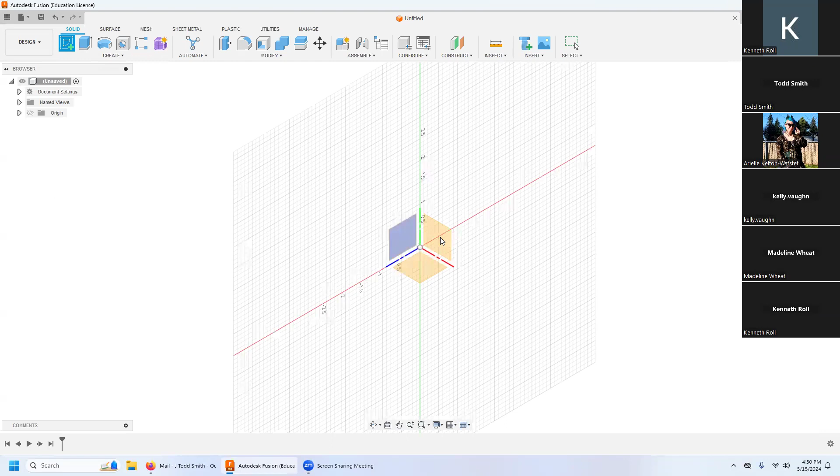Okay, so creating a sketch, coming in here, circle diameter, and I'm setting that to being 1 inch.

And I'm actually going to make that... stop that. I'm going to make that construction. Now, almost always when you hear me say 'stop that,' I am then hitting escape a bunch of times to get out of whatever mode it's trying to do.

Okay, creating sketch again. And I'm going to go over to, now there's something else we can do. Let's see if this is going to work. I'm going to go over to offset. Okay, so I can't offset from that. So maybe I'll hit P for project, and I can project that circle there from my stock representation.

And now I'm going to go to offset. I can click on that and offset it a distance in, like maybe I want that to be—make sure I leave 10 thou per side.

Seems a little shallow. I'm a little nervous on just 10 thou. I like 20 better, honestly. That is to say, I like 20 because I don't trust the stock to not wobble or be egg-shaped or whatnot, and 20 thou per side is going to give me usually enough to clean that up.

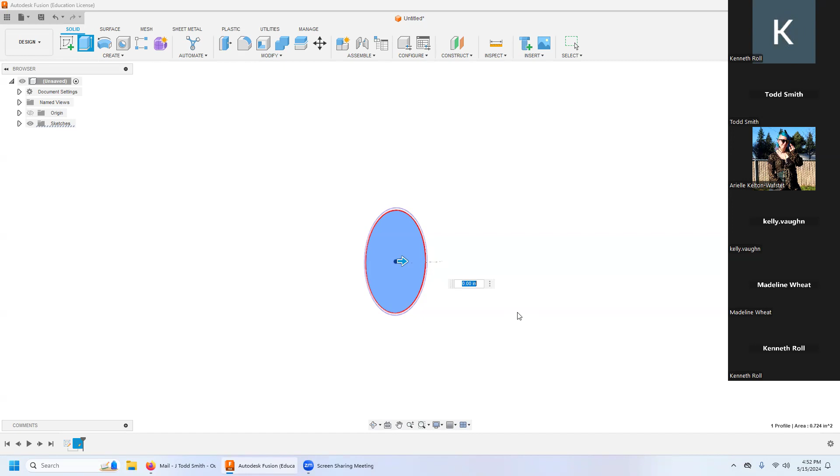What do we want, a quarter inch or an eighth? This is going to be the flywheel of the top. We have a vote for an eighth. Okay. There it is. Ta-da!

Okay, and then I'm going to create a sketch again and grab the face of that one. And there it creates a sketch just directly on that face. Happily, it puts the center of the sketch, the XY0, in the center of that circle.

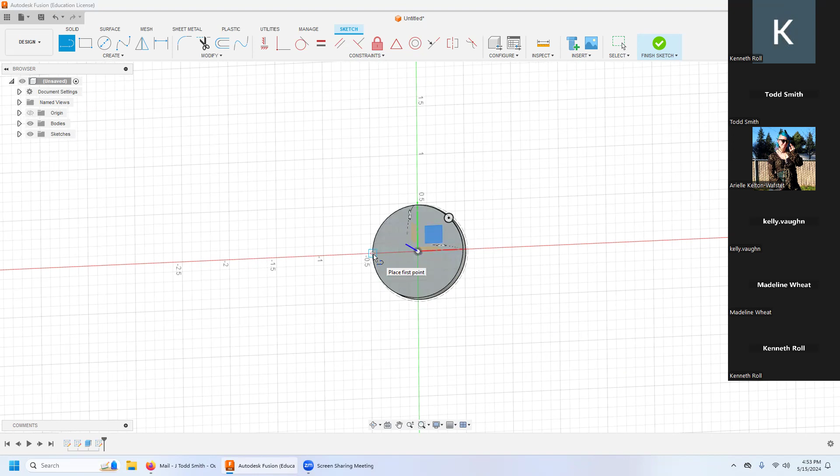If we were nervous about that, as to whether it had actually done it, we could go to line, construction, grab a point on the side there, drag directly across to the other side, making sure that it snaps to a horizontal. There's that.

Then we can grab one up above, do the same thing, and then we can check to see if that is dead center of both lines. So yes, that WCS is directly in the center of that circle, which is what we were hoping for.

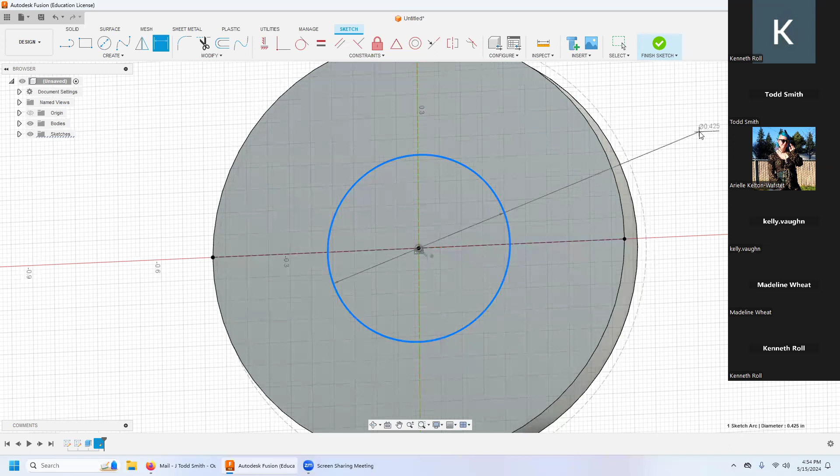Hooray. Okay, turning off construction, going to circle diameter. I'm going to go back to that center bit, grabbing that, dragging it out, going to diameter, setting the sketch diameter to 0.425. That's going to give us something to grab onto for op 2.

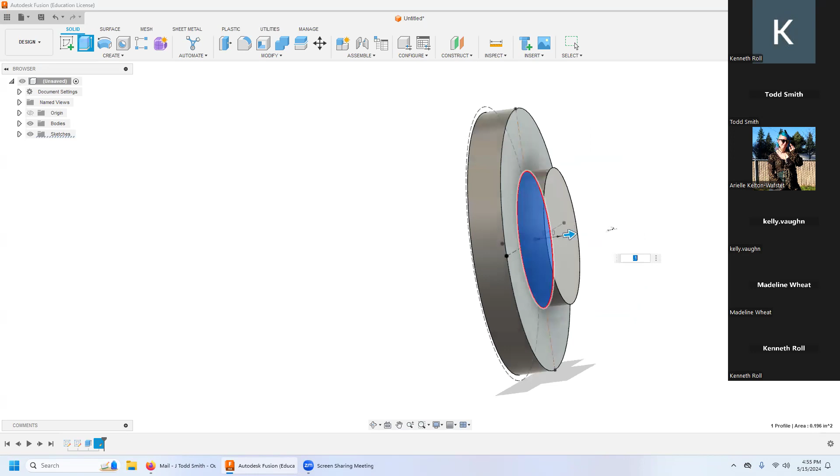By, let's keep it an eighth. Sure, why not? Maybe, let's try 100 thou. Let's be a little more cautious in that. Click on the OK.

And we're going to do the same thing again. We see that it's lining up with the center pips from before. So I'm going to trust it this time.

Oh, I went positive 100 thou because that's just the direction we'd be going on the previous. But do what makes sense for you.

All right, I want this one to spin fast, so I'm going to set that diameter to being 0.1 this time.

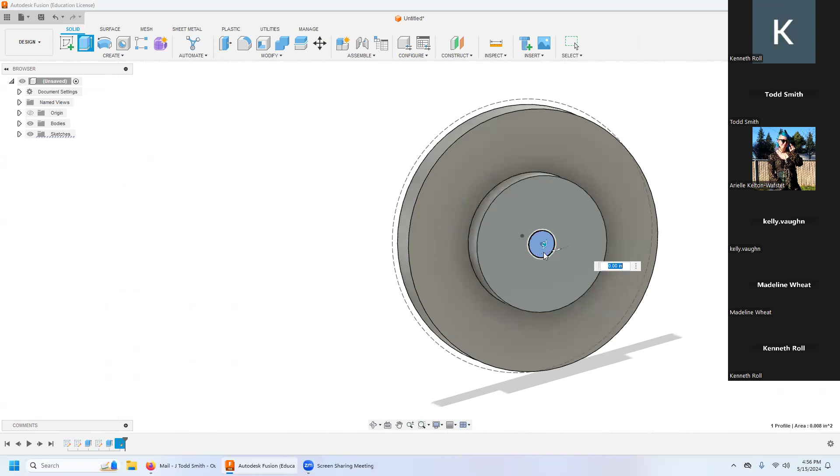And we're going to go to solid and extrude. So we've basically been doing the same thing several times there, over and over.

Well, that's a bit too long, isn't it? So...

Yeah, so let's try with 0.5. Is that going to be long enough to grab onto? Maybe. Let's leave it and see what happens.

All right, grabbing that, okay. And...

Let's do it again on the underside. And this time I'm going to, once again, go with that 100 thou diameter, I do believe.

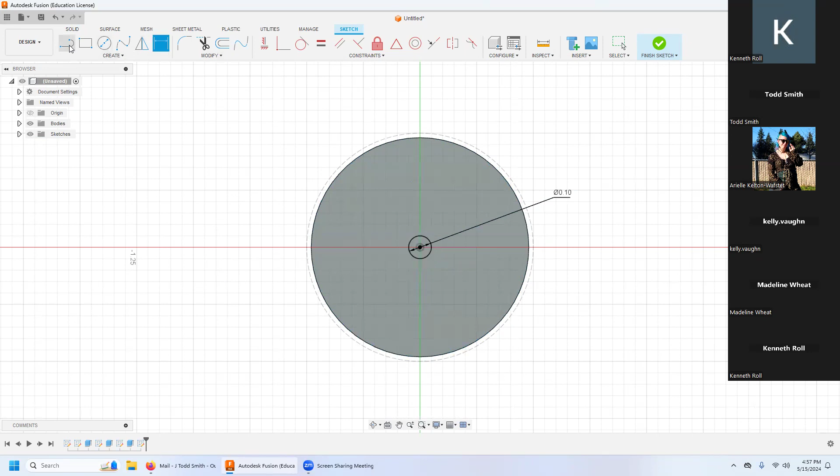Let's try that, and then we're going to extrude out a distance. Last time I did a 1/4 inch. I kind of like that, let's do it again.

Makes it easier to start. Okay, from here we're going to start doing our modifications - that is chamfering and filleting.

Last time I did all fillets, and I think I'm going to add some chamfers this time instead. So I'm going to do those first. I feel like it.

Chamfer - I'm going to do one at the top here. Sure, why not? And maybe we'll do one down here as well.

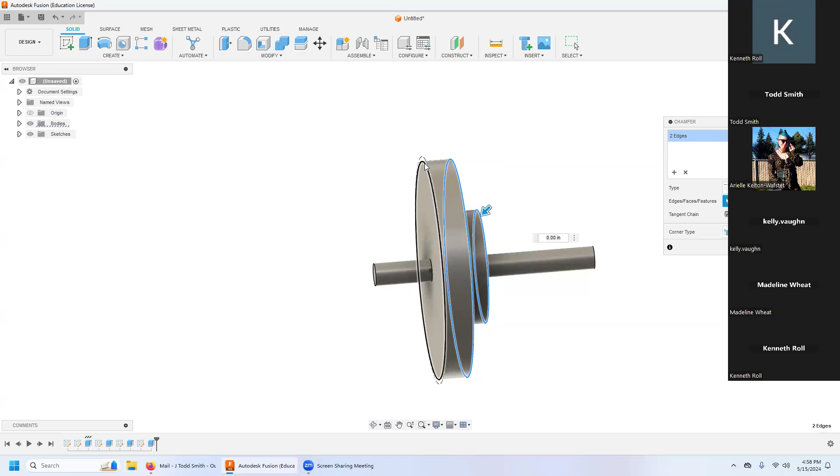We do all chamfers? All chamfers all the time. Yes, we are, okay, all right. So this time I'm going to grab all of those and have them all do the same thing. Let's see what a 20 thou chamfer looks like. Yeah, that'll do, I'll take it. Okay.

And now we're going to do some fillets. I'm going to grab this edge here and this edge here. And those are 100 thou.

So I want to keep that at a 50. If I go over, if I go like a 55, it's going to error - can't do it. I can only do up to the radius. All right, I like that.

Okay, and then I'm going to do another set of here and here. And I'm just going to set those at a 20 thou also, I think, just to keep with the theme. Also to make it slightly more than our 15 thou tool nose radius so we get a better finish.

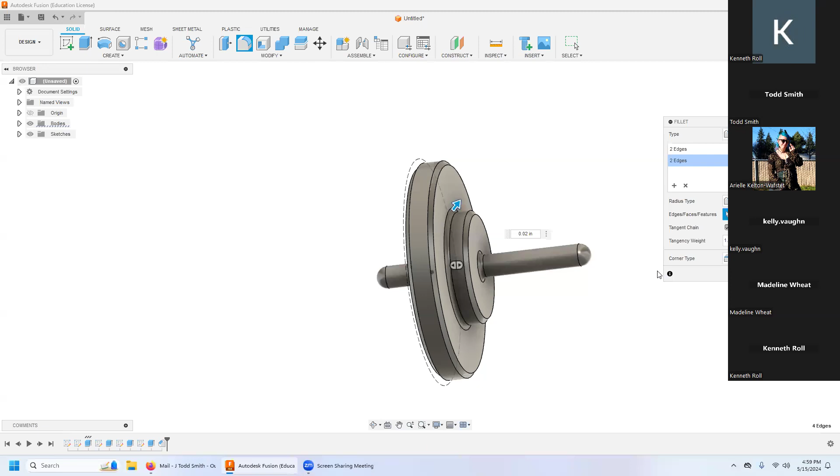I like having a little bit of a slope, and I think it spins better when it has a little more mass around the center. So I'm going to start another one at the base here.

And let's see what a 200 thou looks like. Nah. Half inch - I kind of like that. Let's see what a 3... let's go back to that. 0.5, yeah, I like that one.

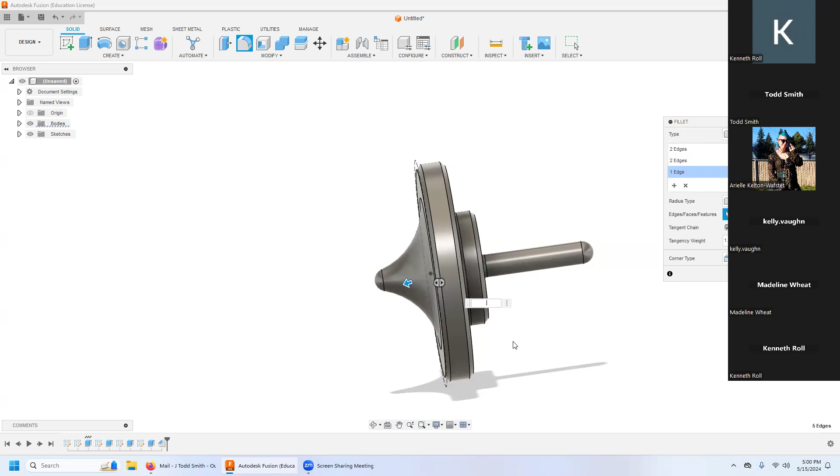Okay. A bit of a different design from last time - a little more stark, a little more geometric. Okay.

So in terms of the modeling, how did that feel? Are we okay? Do we think we can do that? Give it a go, give it a go.

Definitely, okay. Now, here is the thing that is going to prove useful to us. See if I can make it do it right. So I'm in solid, going to create. And where did I put that?

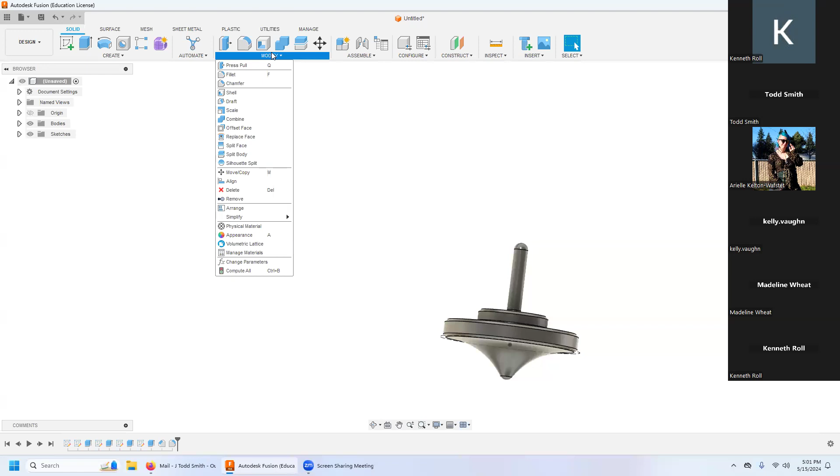Is it modify? Yeah, okay. We're going to go with - we have a couple options. We can go with a split body or a silhouette split. I'm going to go with silhouette split because, well, you'll see in a sec.

Grabbing that one. Okay, now I'm going to grab one of those faces that's going right through the middle. So I'm going to pick this one because I feel like it - there's very little logic going on there. Just grabbing it. Okay, so for the view direction, I selected one of those planes.

Now for target body, I'm going to select the whole thing there. And operation - split faces, split shelled body, split solid body. I'm going to go with split solid body.

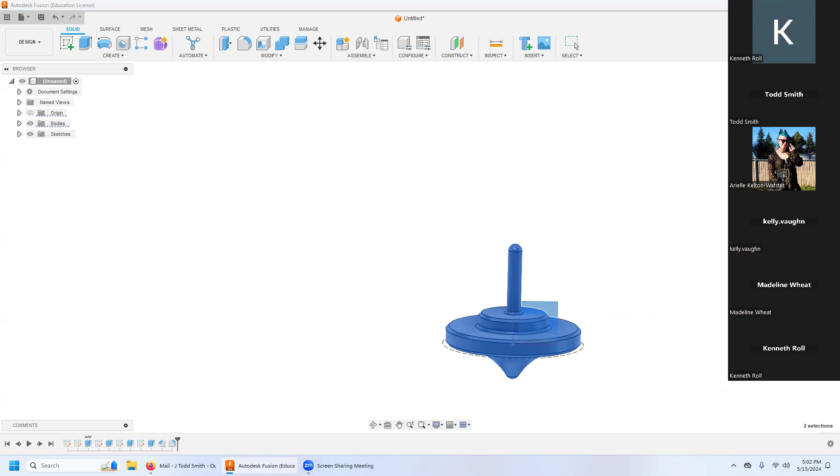Bang. Now, look at that. It has split our solid into two pieces, which is kind of handy in that.

Let's go bodies - you see now we have two bodies there. If I turn one of them off, I've got half of that part.

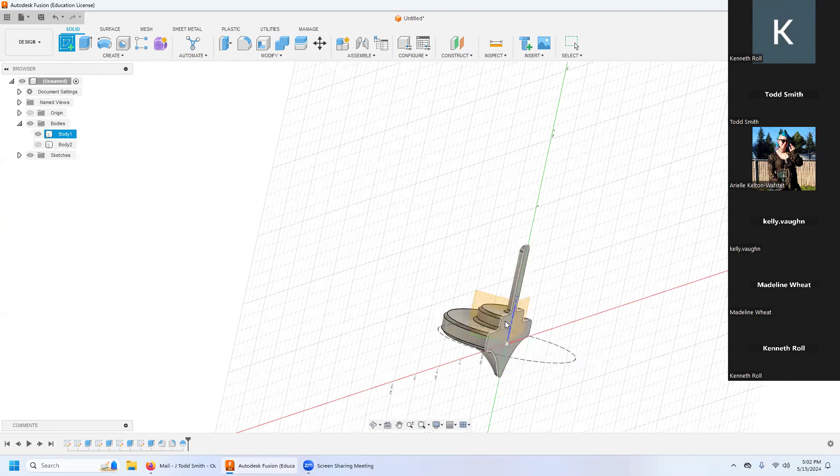So what I'm going to do then is go create sketch, and I'm going to grab that split face there. And now I'm going to project that entire face.

So if I turn that body off, I have a perfect outline of my part. That, ladies and gentlemen, is handy, especially on the lathe.

Okay, I'm excited. So what'd you guys think about that last little thing I showed you? Feeling good? That was in solids, modify,

split body - no, sorry, it was silhouette split. And then I changed it over in this pane over here to split the solid instead of various faces.

Okay, I'm going to finish that sketch.

I'm sorry, sir, you're quiet and breaking up. And I have my volume at max, so you got to get closer to your speaker - or your mic, that is.

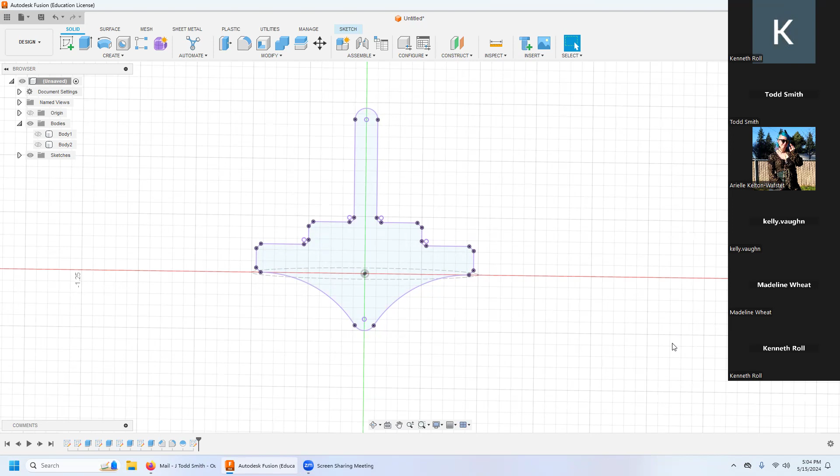Oh, there it is. It's back. One more time. Oh, my screen went black and I didn't see what you were working on, and now it just came back to the screen. Oh, that would be Zoom having some issues. Sorry. So what point did I lose you? Okay, I'm glad it's back though. Thank you. Yeah, okay, speaking of which, I'm going to stop my recording.

Okay, so that was the end of the design phase. And now I'm going to go back to begin recording here.

Okay, now we're going to go into the manufacture phase. So I go to design, come down to manufacture. Here we are. Cool and groovy.

I might need the models turned on, so I'm going to turn those on just in case I need them.

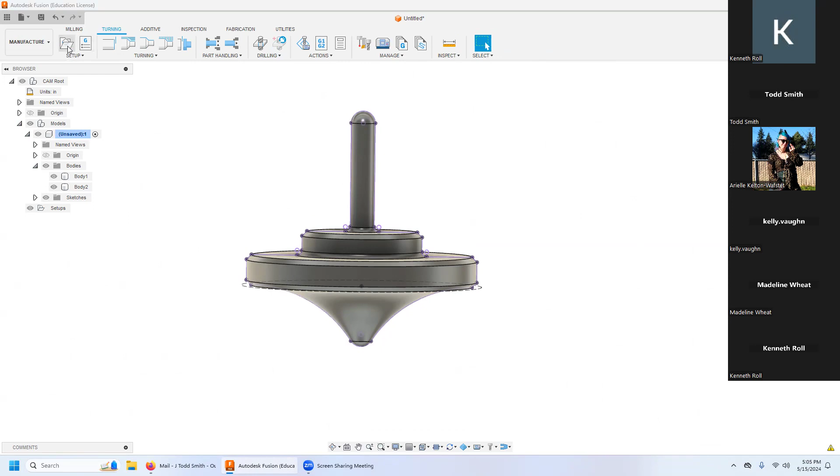Okay, let's fire up our setup. So it decided that it knows what we're doing, that we're going to be turning, and it is right. But just in case it starts out in milling, we're going to go to setup. They can change that to turning or mill turn.

Okay, our stock here. So it defaulted to a 1-inch diameter and a 1-inch length. Let's give that 1.5 inches in length. Model the position offset to front.

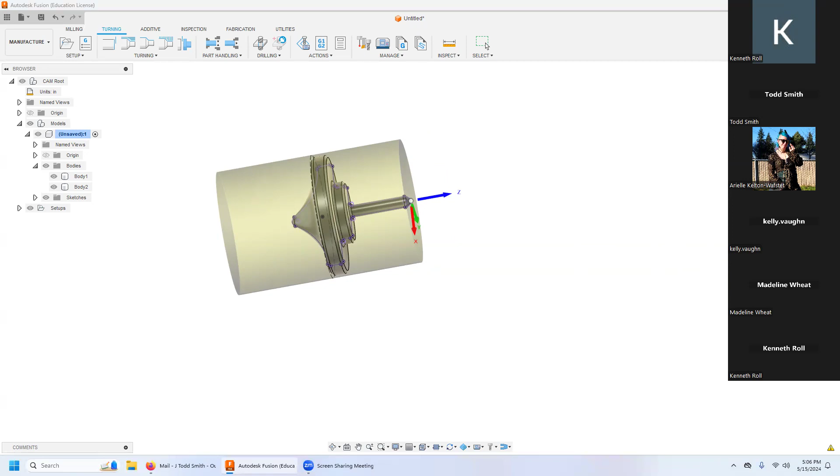And we're going to offset that by 10 thou, so now the stock is bumped a little bit in front. And we're going to cut this step here in the first op because we need it for second.

Okay, now we're going to change a couple things. We need our X to be aligned with our drawing, which it is. That's good. We can see that this X is parallel to this drawing here, which is what we need.

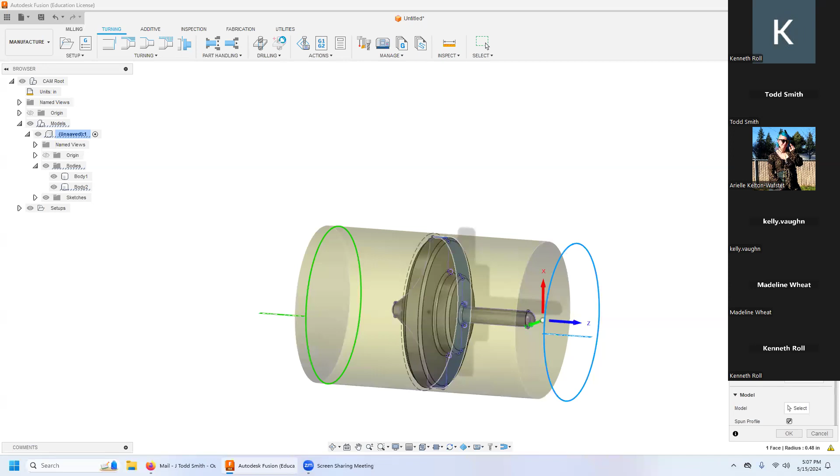However, we want our origin to be model front. Doink, there it is. Very, very important. If you have your WCS on the front of your stock instead of the front of your model, your operator is going to think you're an amateur. And we don't want that.

Okay, now it's going to try to spin the model to figure out its outline, and we're going to let it. That's fine, because we can take control of that later.

Now, if we go to machine, we might have some problems. Let's see what happens. I don't think it's going to do us any good.

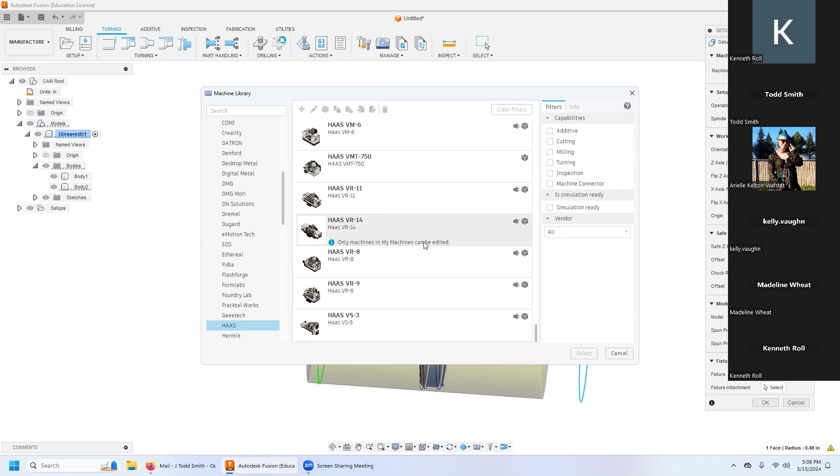They are still working on their lathe machines for Haas. And we come in here and let's clear the filters. And those are all mills. There are no lathes. I have a lathe model that I don't remember how I got. I thought I downloaded it from their website, but I can't find that anymore. I might have downloaded it from Andy. I'm just not sure, I don't remember.

But it turns out with some experimentation, I've seen that it doesn't need a machine to post the G code, so we're going to cancel that.

Post process. All right, I'm going to pick a number. I'm going to go with this time with month, year, and this is actually the second program I've done today. And this is 515 lathe 2, op 1.

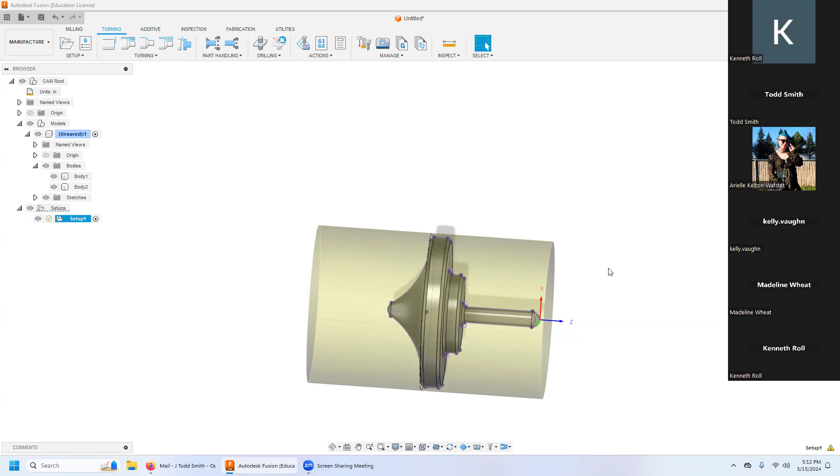Okay, I have returned. So from here, let's talk about tool pathing.

First, we're going to face, and let's go select that tool.

And now you notice it's calculating the spun profile. We don't have to use the spun profile. It makes it convenient, but because we split the whole thing in half and created that outline, we have more options. We're going to look at those, because sometimes the spun profile goes crazy, does just weird things.

Okay, so coming over here to turning tools, turning general. Now I want the right hand with a 30 thou-ish tool nose radius. If you can't see that part, come up, find that little line there.

You miss it, there it is. And you can adjust how much you can see. Usually you start out right there, so open that up, makes life easier. Okay, we want the right hand, don't overthink it. Right hand. Select.

Okay, speeds and feeds, I'm not going to deal with right now. We're going to talk about those later using the machinist handbook, but I don't want to overwhelm you all right now.

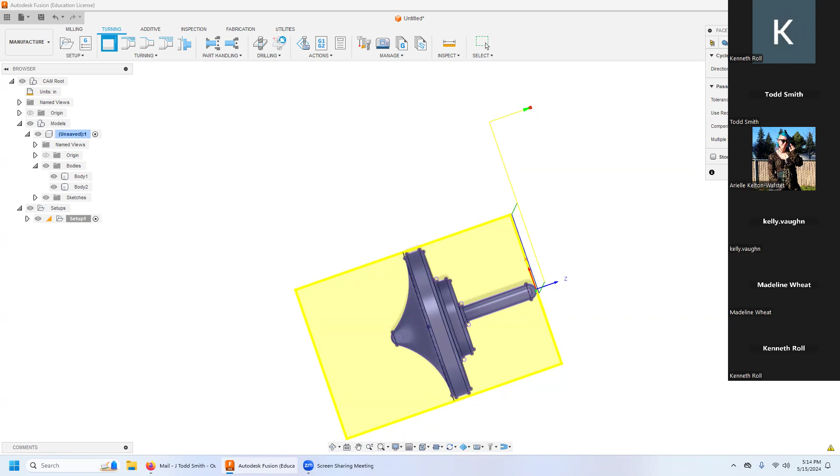Okay, so I go to passes and everything's looking pretty good. I like this, I don't need to change anything. Because we already changed adding the 10 thou there, I think, didn't we? Yeah, we offset that by the 10 thou. If you didn't want to do that here, you could do it in stock to leave as well.

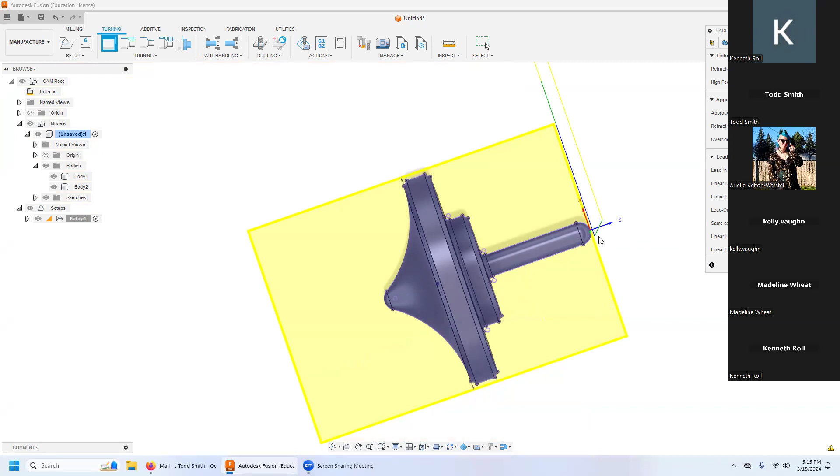Okay, now in here, as I mentioned, I don't like this 45-degree approach. So I'm going to change, same as lead in, I'm going to turn that off. I'm going to change the lead in angle to being 90 degrees. And I don't tend to like it to leave on an angle either. I tend to prefer it to come out in a zero. That's up to you, but your operator will prefer that 90 degree. It's less of a surprise.

Oh, I forgot to check my radii. Let's look at that. Oh, those are way too big. I don't like those, too big, too big. Now, one nice thing here is if I grab this olive color here, the outer retract, it tends to step in 100 thou. And 100 thou is usually what I like to use. So if I go 100 thou, 100 thou, then it does the same thing as what I normally do, but without me typing it. You know, do what you like.

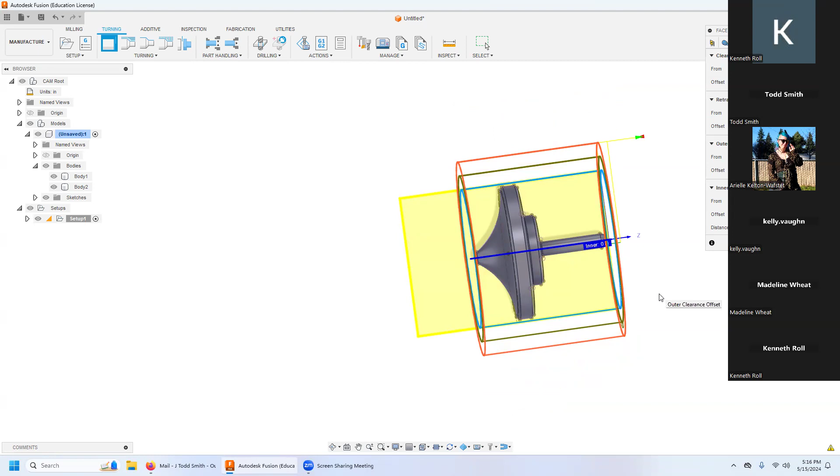Okay, now I've got a little bit shorter here, and that's just fine. Okay, there it's in the facing. Oh, I didn't check this though. I almost forgot. It's probably going to do okay, but I like to put in on the inner radius.

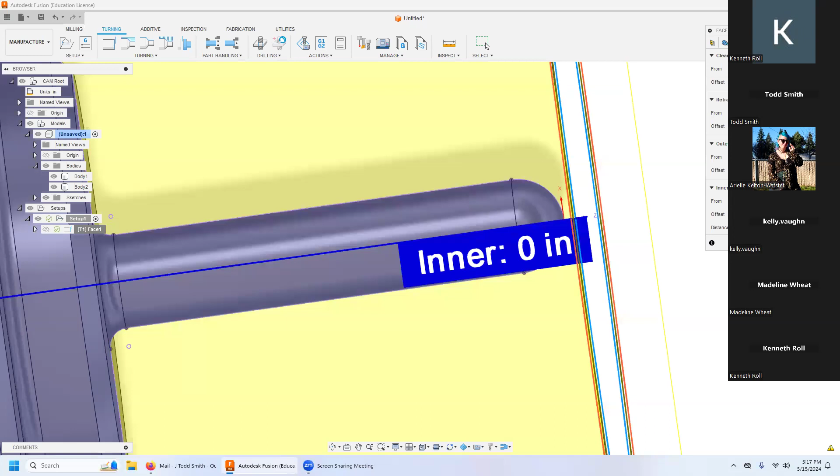Distance to cut below is the tool nose radius, which was a 0.315 something. I'm just gonna go a 0.32. I said 2, there we go. That is wrong, 0.32. There's a little bit of a difference. Squirrels, squirrels running around in my brain. Okay, there we go, much better.

Okay, so now it's diving down about the tool nose radius below the center line of rotation. Groovy. Okay, now roughing, we got a lot to pull off there. So I'm grabbing there, and it grabbed the same tool. Again, I'm not dealing with speeds and feeds for now, we'll save that for maybe Monday.

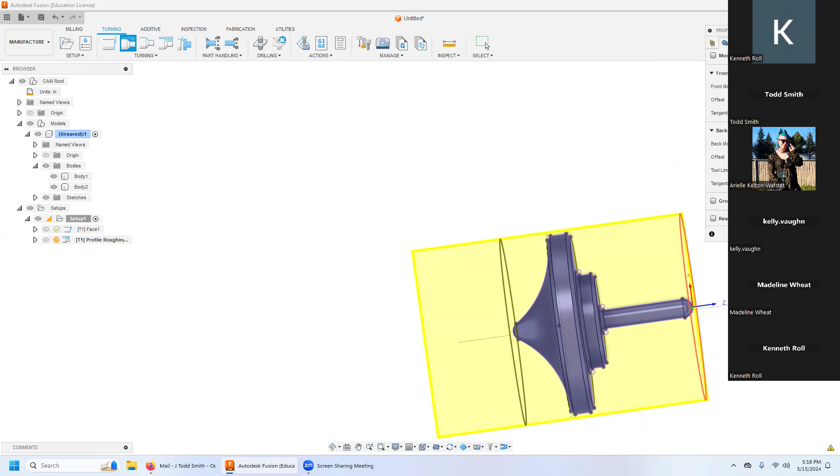Geometry, okay. Now, what it did here is when it was calculating that spun profile, it looked at the solid and decided, okay, based on that, here's what I think your profile is. And sometimes it's going to be right, and sometimes it isn't. If it cuts into your part, when you look at the simulation...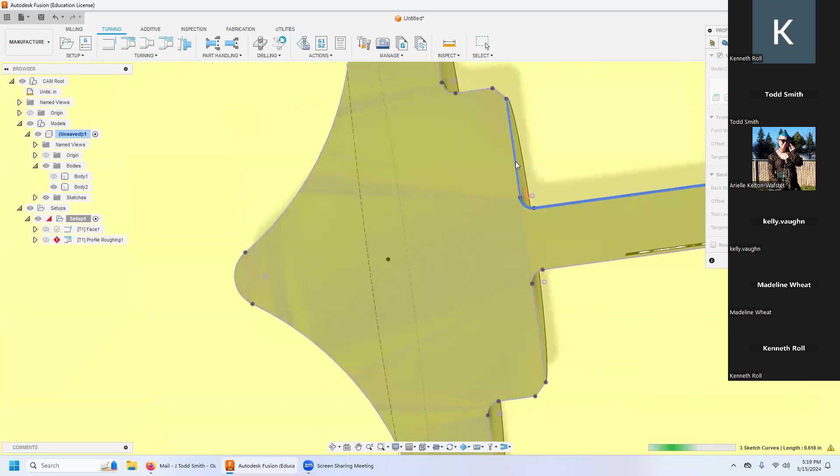Then instead what we can do is we can go to model. I'm actually going to turn off one of those bodies there. I can go to chain, open chain, and I can start selecting all those little lines that we had created earlier. Remember that?

That's facing the wrong way. Let me make sure it's, nope, I got a problem. I think I have a problem. We'll see, I'm gonna ignore it for now. I'm gonna see what happens.

Okay. And let's see here. So in front, I'm not going to deal with the offsets here. We're going to try to deal with it someplace else. I usually prefer it elsewhere. Okay, but I am going to change the model back a little bit. And I think this is not going to work out for us. We're going to come back and find out why in a moment. But I'm going to offset the model back by the negative 0.155, which we had calculated before is going to give us a 30 thou facing plus room for the part off. Okay, there we are there.

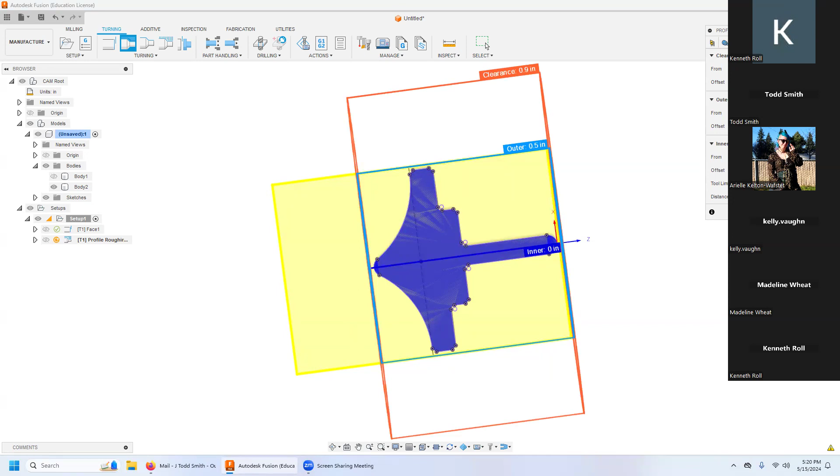And let's bring that clearance down into that 200 thou. Passes, maximum depth of cut, we're going to take 100 thou radially. We're going to get in there and get a bite. Stock to leave, 4 thou is not enough. We want 10 thou radially and 10 thou in Z. And I'm going to extend that to the stock. We don't want it to groove down in here, as you recall. So I'm going to come up to grooving and say, don't allow grooving. Before we mess with this down here in the linking, let's see what it's going to do first.

Bump, bump, bump, bump. Ooh, that's nice. Now it didn't go out as far back. It's supposed to be coming all the way back here, right? Remember, we told it to. That's because this nose is curving down under, so it doesn't know what to do. It got kind of lost and confused, just like me.

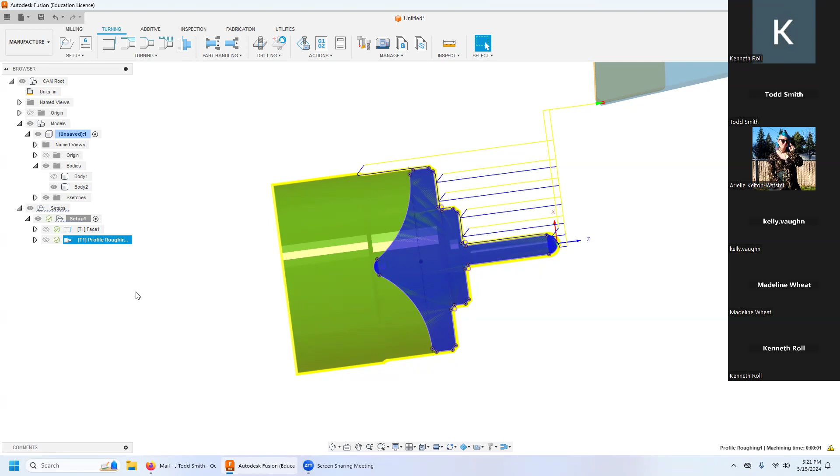So let's try something, see if this is going to work. Going to go back to geometry. I'm going to reselect, and I'm going to grab that chain, open chain. I'm going to see what happens if I just grab that. Make sure it's going. I don't like that it's facing the wrong way, but it's on the correct side. Let's leave it alone and see if it does anything goofy or not.

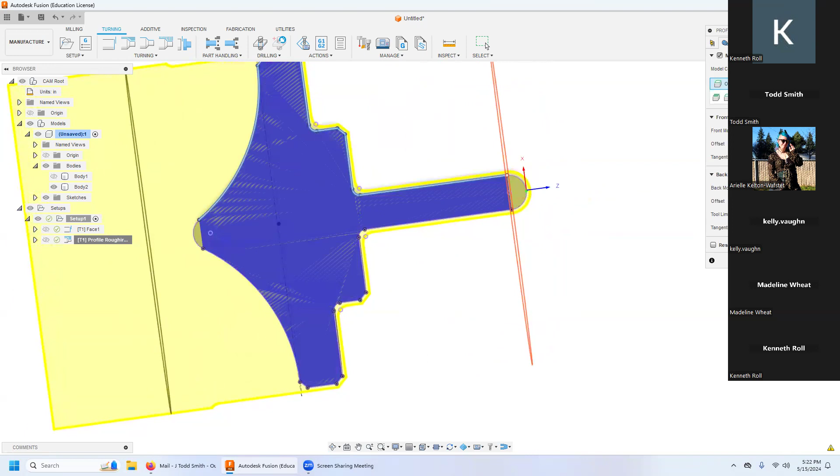And I'm not going to select the end that curves under. Let's see if it behaves itself or not. Everything else is the same. Well, once again it ignored us there. This one did pretty good in that - remember how before we did just kind of that nubbin so it wouldn't bend the spindle? So now it's just coming in immediately. Now it's inside the face, and I don't like that. We'll have to make some adjustments there. It's going to get a little crashy otherwise. Don't want that.

Is this what you must do? No, it's just a thought, a way.

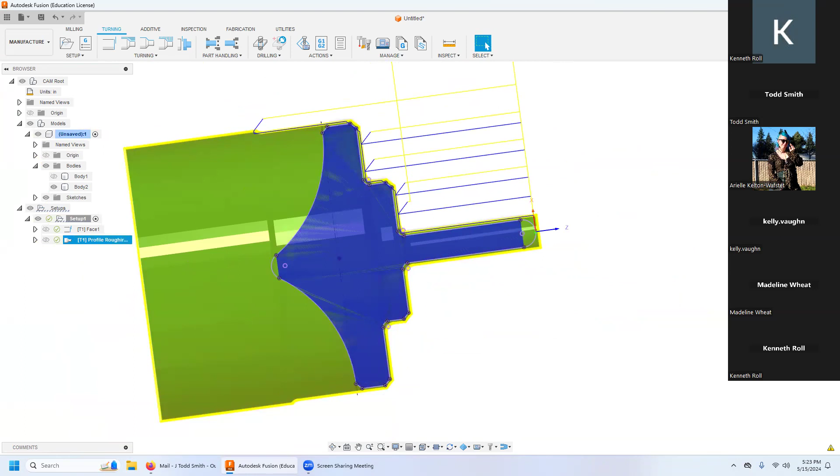So let's make some adjustments, make this work better. And you notice I'm not just getting it right - I'm not just stepping up and doing it perfect. All right, I'll move that front out a bit. There we go, a little further out than we need. And I'm going to go, on the back, tangential extension by 0.155. Let's see if that does what we want. There we go, there we go. So the tangential extension came down along here and then swung out further, and because we didn't allow it to groove, it went straight back.

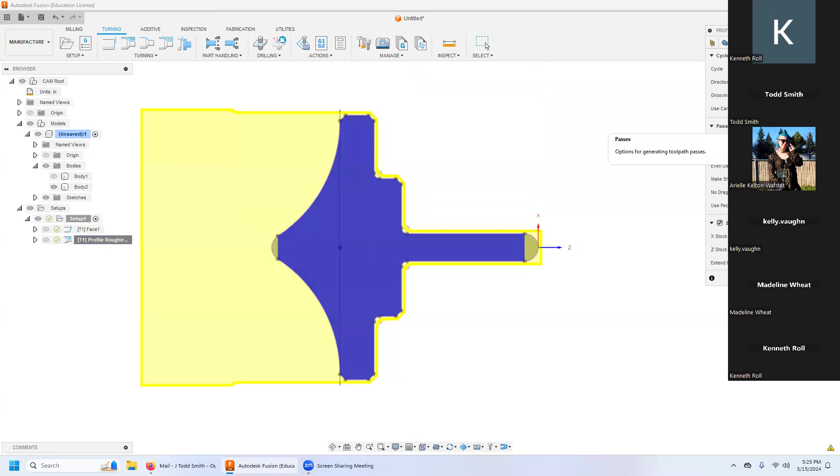And we're still out here in crashy land. I don't like that, let's see what's going on there. Not to my preference. Nope, didn't do a thing. Okay. What about... Why is it ignoring me? I truly don't know.

I'm telling it to start out here, and yet it's not doing it. So let's offset that - I'm going to force a 200 thou. And let's give it a tangential also. There we go, there's that 200 thou tangential right there. So I can shrink that up, but you got the idea.

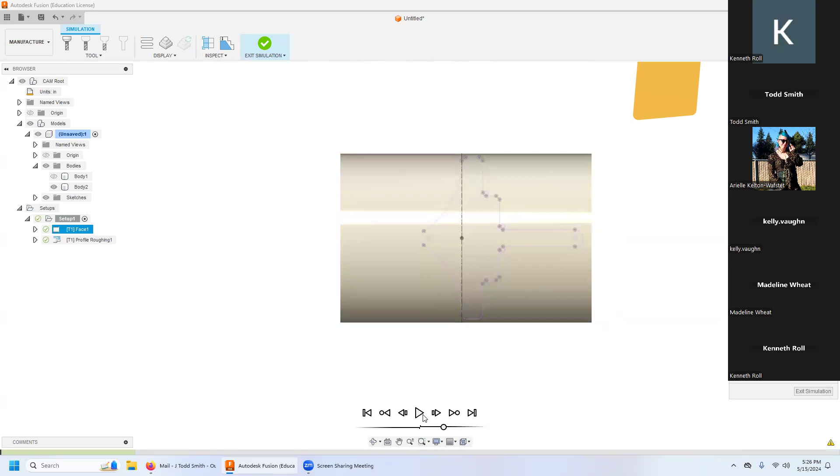Let's run it, see what it's going to look like. Face, zoom, zoom, zoom, zoom, zoom. Yeah, that's going to throw some heavy chips. Definitely, okay. And we're looking at not even half a second. Yeah buddy, that's fast. Now it's not going to be quite that fast in that this doesn't calculate the rapids very well, but you get the idea. We're looking at some real nice profit.

Okay, next we're going to face again, but this time it is going to be turning tools, turning general - it's going to be with a finish tool. However, the finished tool, for some reason, defaults in the library to 0.2 millimeters. I don't know why. That's okay, we can fix it. We'll go with select.

Then we're going to go into select again, and then we're going to modify it - right click, edit tool. And we're going to go to the insert. We're going to change the unit to inches. And the corner radius, we're going to change that to a 64th - 1/64. And that's going to be essentially a 0.015, so about a 15 thou tool nose radius.

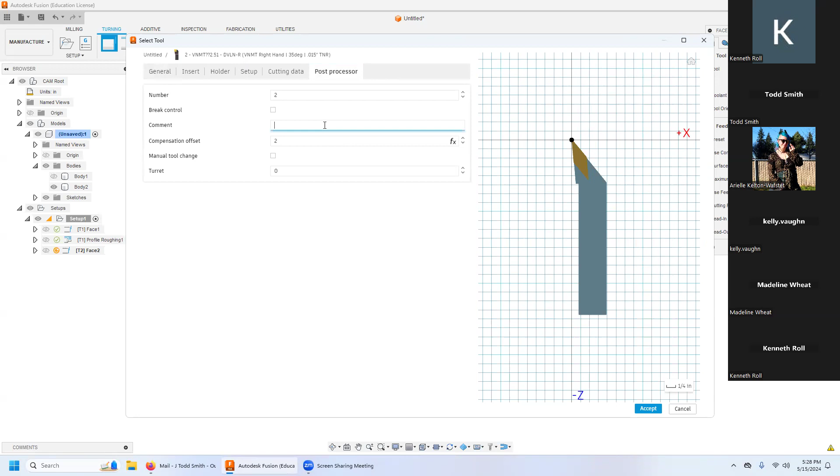Back in there, and it's got this funny thing going on here that I don't like. I'm just going to put all that in there, see if that's going to fix it. Okay. It doesn't like that code at all. So let's... I truly don't know what's going on with all that.

Okay, and we can change that in the NC post, just so we don't confuse our staff. Again, not dealing with my speeds and feeds right now, but I do know that because it's a 15 thou tool nose radius for a finish tool, I'm going to give it honestly closer to a 3 thou feed per rev. But we'll talk about that more later.

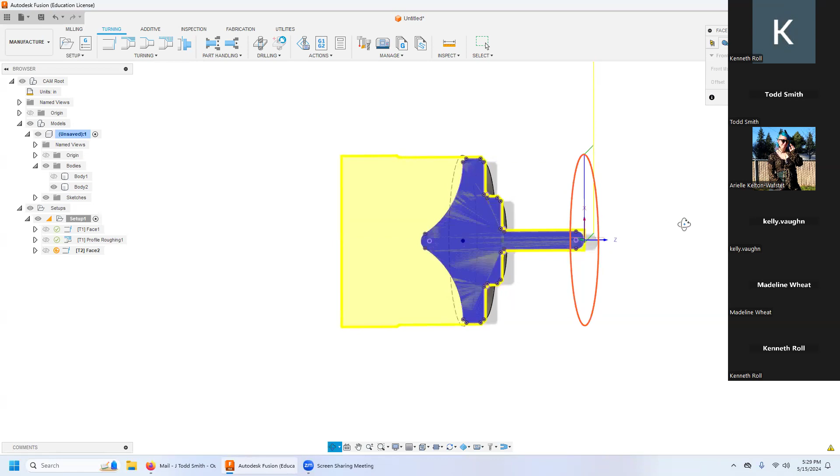Geometry. Okay, yes, model front, that's going to be just fine. Radii - let's get that retract down in and our clearance down in much better. 100 thou, 100 thou, yes. Distance to cut below - 15 thou, please. If you wanted to go a little bit further, 16 thou, fine.

We don't need multiple passes. We've already done all that kind of stuff. All that looks fine.

We don't want that angle. That's not very nice to our operator. So we're going to change the same as lead in, turn that off, and turn our lead in angle to 90 and our lead out to 0. Nice 90-degree angles.

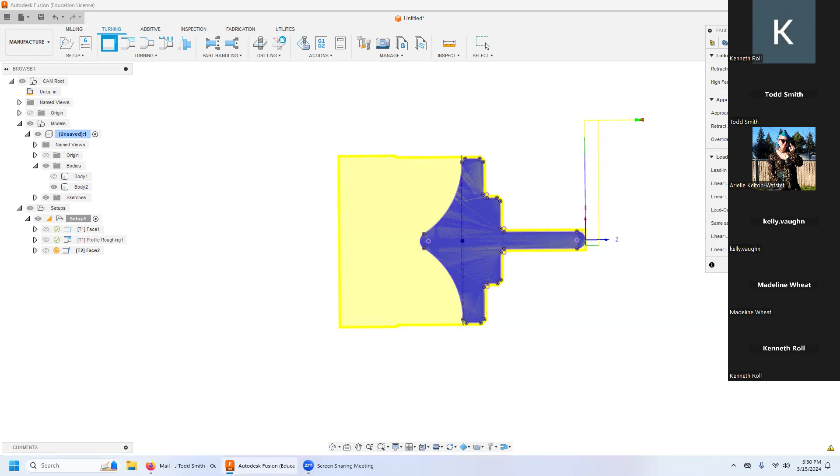Much more better. Okay, clicking that okay. Now when it's coming in, the operator knows where it's coming in and can predict the action. That'd be good.

All right, now we're going to turn profile, and we're going to help ourselves out a little bit here, because that corner is going to be a little chunky for the finish tool. And this may be made of regret. We're going to find out.

So let's see here. Okay, tool 2. Again, ignoring the stuff. We're going to shorten this up to just there.

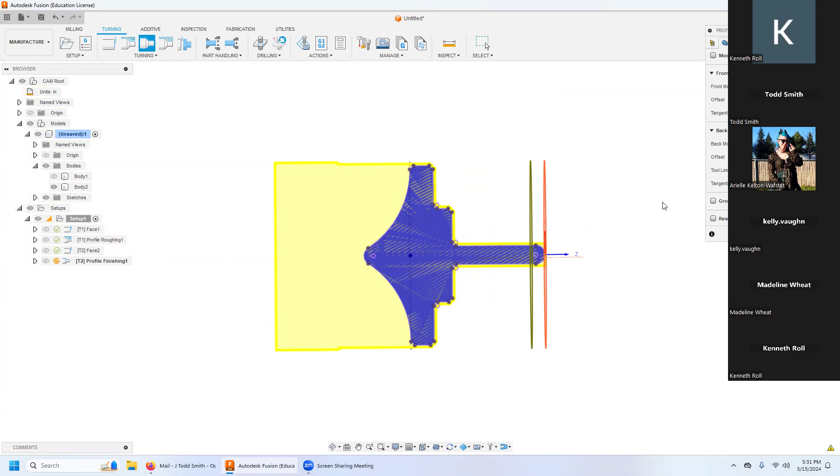And we're going to go model, select, open chain, and we're just doing that one. That's all we're going to do on this at the start. Radii.

Pull that in. Pull that one in, not going all the way in just for safety. Passes - I actually want to try. No, we're not going to do it in passes. We're going to do it in stock to leave. Yes, let's do that. Let's leave it a 10 thou here and a 10 thou there. And let's see if we think that's going to survive.

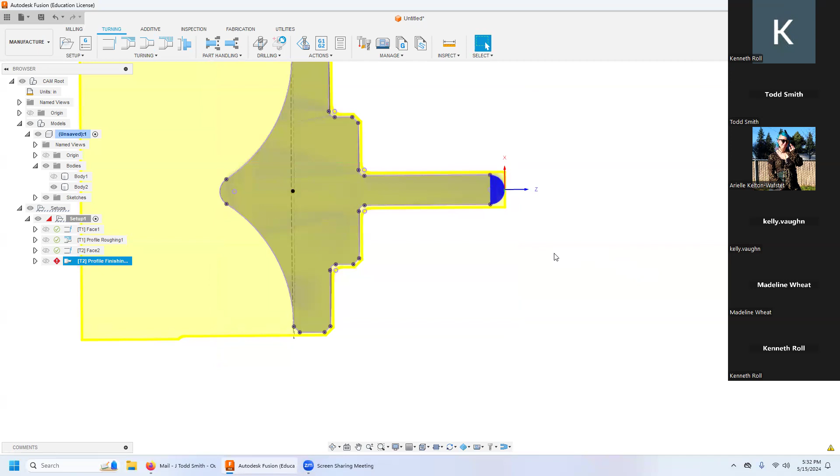Nope, it didn't like it. How come? All right.

Let's try edit. Let's try turning off the model and see what happens. All right, it's happier there. Fine.

Now I don't prefer that angle on it. Let's change that lead in angle to a 90. Well, that's a weird angle too. Well, it's because it's on that curve, right? And so it's kind of hard to gauge.

Let's put that back to the 45, 65. I don't feel like doing the trig. I should. Well, anyhow.

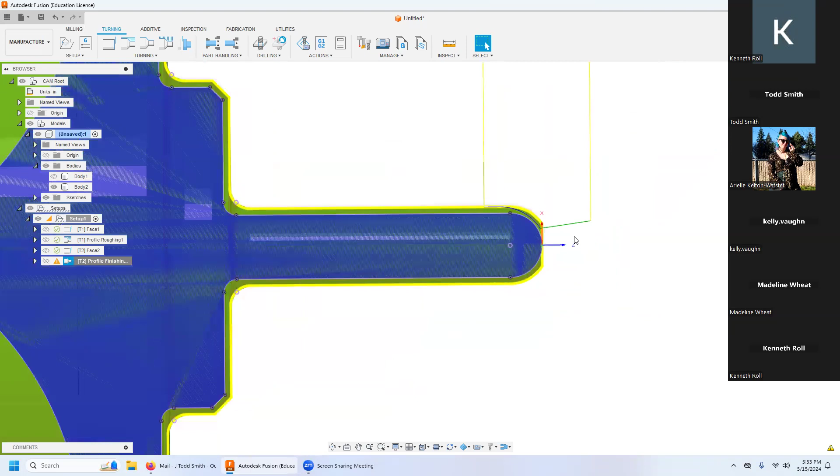It's going to hog off that extra bit. Is that going to be too much? Let's go get a peek. Oh, wrong one. My concern is whether or not it's going to bend our spindle.

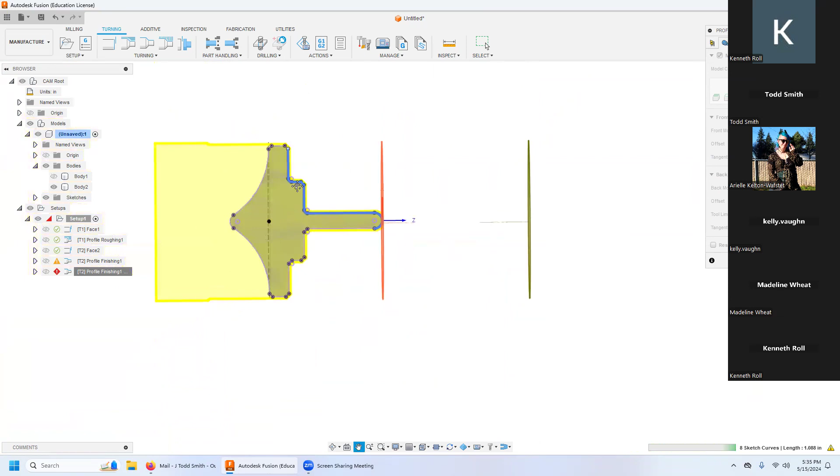I have a suspicion I'm going to have to change something. We're going to find out. Okay, and back tangential extension, we're going to do that 0.155 again.

And we're going to bounce this back out to our stock. What am I missing? Stock to leave. We're turning that off. There we go. Let's see what we do. Oh, I know what I missed. Here we are.

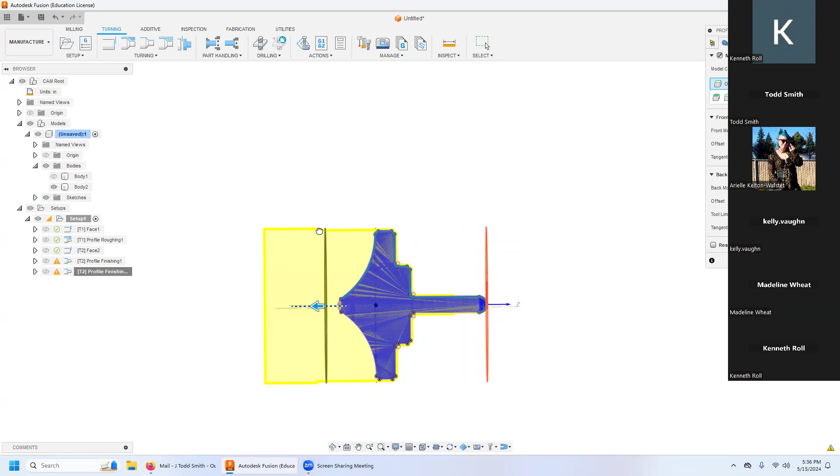Aha. Not quite what we want, but it's close. We're going to go back in, edit, and we're going to make certain to turn off grooving. Don't allow grooving.

Nice. Okay, then we're going to go to setup 1, and we're going to simulate. And here it goes.

I didn't like that travel up, that face at all, did it? Yeah, on this face and that face. It will do fine. There's a little grumpy there.

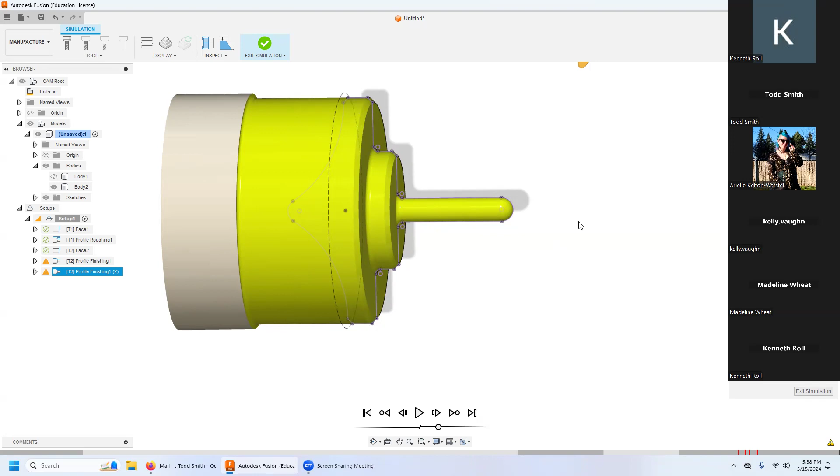It might end up a little bit chattery. If it is, we would set up some separate tool paths so that it travels down this one and down this one, and then come back and finish everything up. But I've done this before, and it turned out perfectly fine, so I think it's just being overly whiny.

Okay, but by traveling that outline, everything's matching up perfectly. Okay, now that blue thing hiding in there is its theoretical turned face.

And it's behaving today. But there are days when it does not, where in here it just cuts all that off or sweeps down in something crazy. Keep that in mind. I like having that outline so that I can protect myself from a badly extrapolated part. Okay, next we're gonna do some grooving.

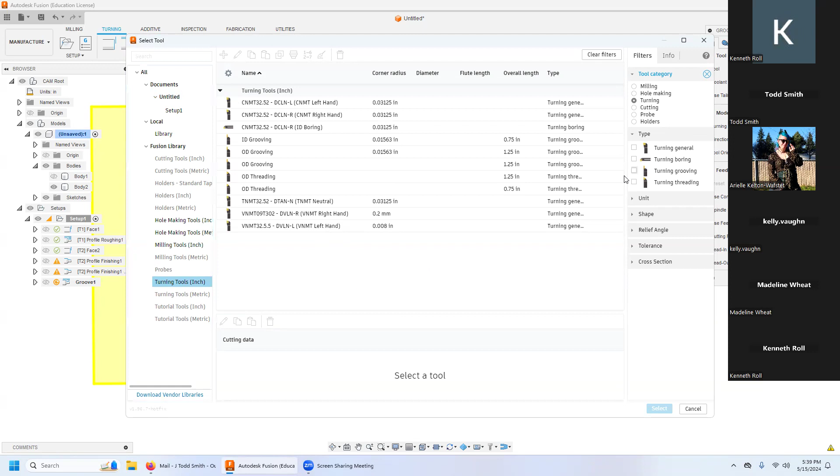Tool. We're going to go to turning tools, and we're going to go to turning grooving. I don't know much difference between them. I know this one down here has a round button, and that's not what we have in the shop. I'm going to go to this one here. I'm going to select it and go back in.

I need to actually measure our inserts, but it is my belief that the part off inserts that we have are... let's see, where is that? Not there, not there, not there, right here. I believe our groove width is actually 1/8 of an inch. I need to confirm that, and you guys would have to as well for yours. We'll talk about that later. Okay, 0.125, and I'll let you guys know if I discover otherwise.

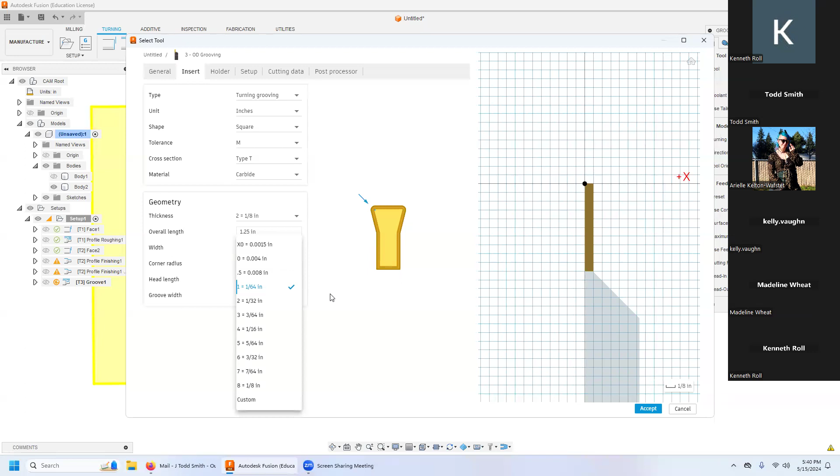Yep, corner radius. I think that's just fine there, 64th. OD grooving, 0.125 width.

Put that over in comment. The thing you put here is what will end up in the code for the operator at the beginning of the toolpath. That's handy.

Okay. Again, feed and speed, different day.

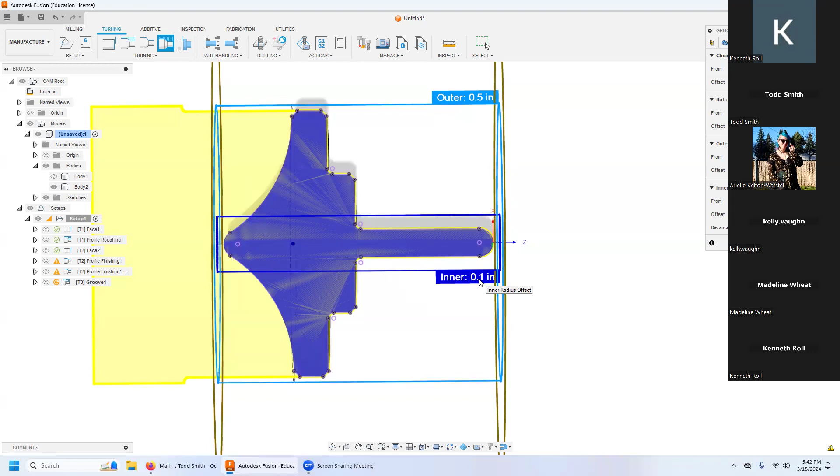All right, I'm going to drag this front back to here. I don't want a razor blade, so I'm going to bump this back to here. Okay, I'm just going to leave it as it is, I think, at this point. Now my inner, I don't want to come all the way down or it's going to fall off, so I'm going to bump that out to being like that's a 0.1 radius, so that's a 200 thou diametral. I think that will be strong enough and we'll have saved us a lot of time in Op 2, because again, Op 2 needs to be gentle.

Passes. Okay, we're going to leave all that alone. Maximum grooving step over 40 thou, nowhere near enough. We've got 1/8 of an inch total, but we do want some overlap. I'm thinking we'll still have a decent amount of speed if we go with a 0.075. Might do 100 thou, but I think 75 thou will do just fine. I tend to like pecking to break the chip.

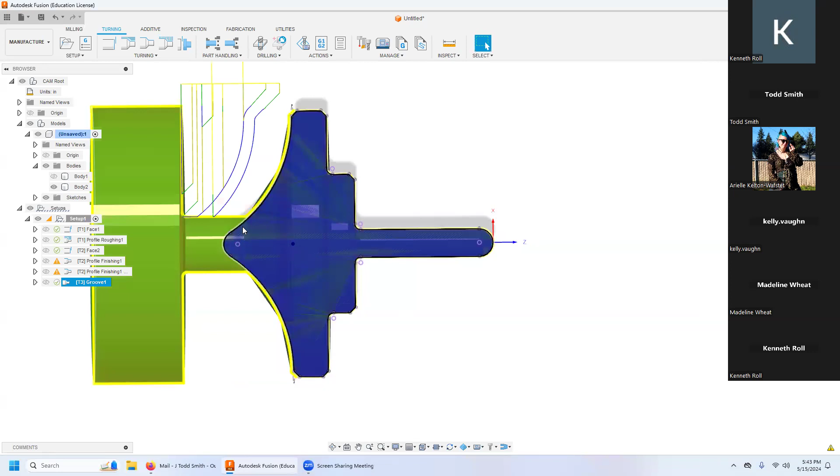Yeah, okay, let's leave that alone, see what it does. Let's give it a stock to leave, and we want to make sure that that's 10 thou on radial and axial. We'll come back to this if we need to. Okay, let's see what that actually does.

I didn't like that second step over, it was pretty chunky. See, I've got two of those there. I don't know that I prefer that. Let's see if we can minimize that.

Let's see here. Roughing passes, there's some grooving step over. Tracking retract, let's turn that off. Aha, there's just one, see what that looks like.

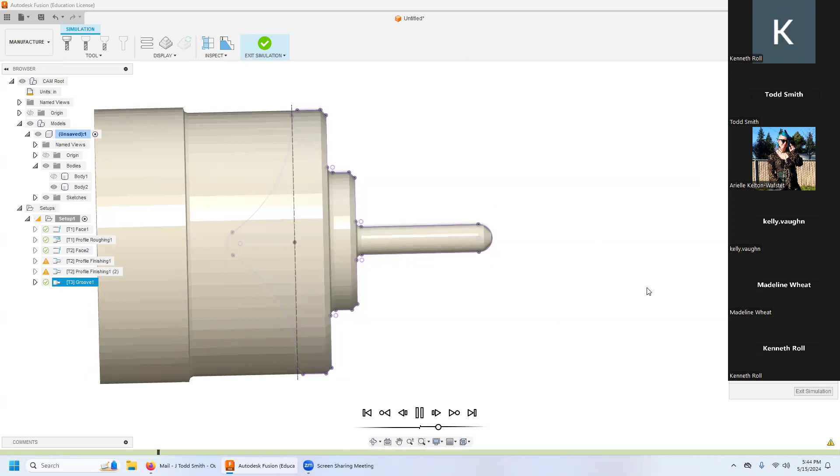Go. Zoink, zoink, zoink, zoink. Yeah, I like that better. You may not. You can make different choices, and that's okay. We'll find out.

And then we're going to go with a part off using the same tool. However, let's see, that's looking fine there. This is a bit much out here. Let's see if we can reduce some of that.

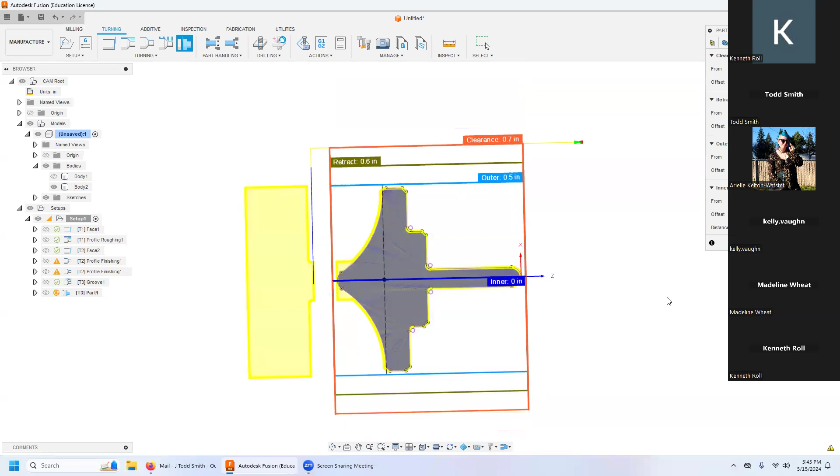Retract and clearance are on the same spot, so let's change our retract to being outer radius plus 0.1. No, not 1 point, 0.1. There we go, slight difference. Okie dokie, that looks much better.

But we're going to use a stock to leave, and I want axially to leave 30 thou. And it didn't update in the drawing, keep that in mind. Okay.

That looks pretty good. Now, you're going to want to use a parts catch, and we're going to want to add that to the code manually, or simply not come down all the way to 0 for the part off so the operator can snap it off manually. But with this thickness here, I don't know, depends on if we're on the TL1 or the ST10.

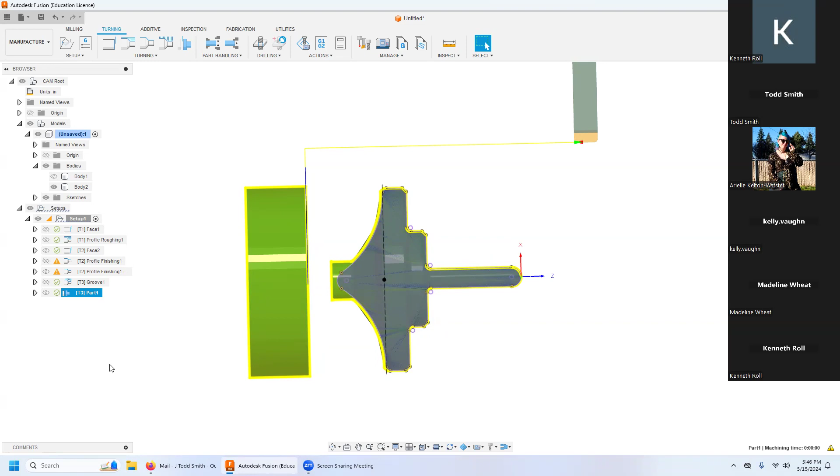All right, feeling okay there. And that first one is looking like it's going to be approximately a minute. That's pretty cool. Zoink.

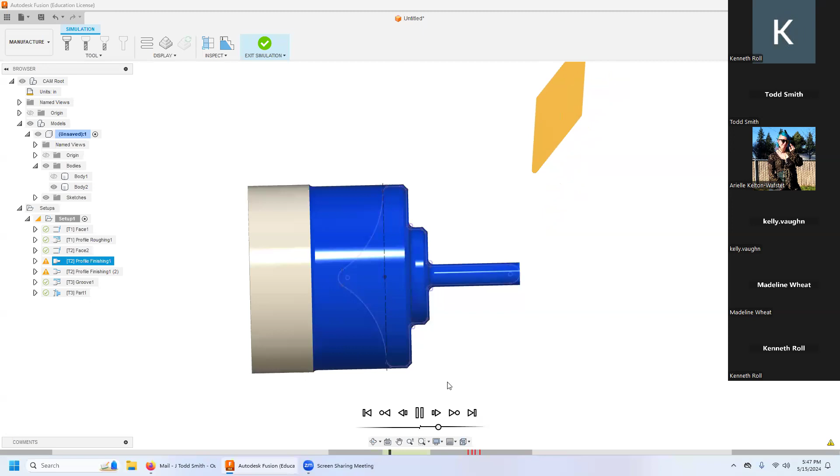Now, partially I was leaving the speeds and feeds off because I had not decided what material I wanted to cut today, and two, I wanted to leave you guys time enough to work and ask questions. Yeah, it says we're crashing, but I don't believe it. I think it'll do fine.

So I didn't like the size of those steps there, just now watching that. You might want to change that. But may as well run it, see if it works, right? Before you make changes to something that doesn't need it, and we don't know until we have more data.

Okay, let's save that real quick. And this one, hang on, we're in 215. I'll be in 215 spring. There we go. And we're calling this Lathe 2. Terminate.

Okay, I'm going to stop my recording. I wonder if by stopping that recording, is it going to splice all that together, or is it going to be separate recordings? I don't know. All right, so hang in there, I'm going to dash off and check on the guys in the shop. I'll be right back. Ponder questions.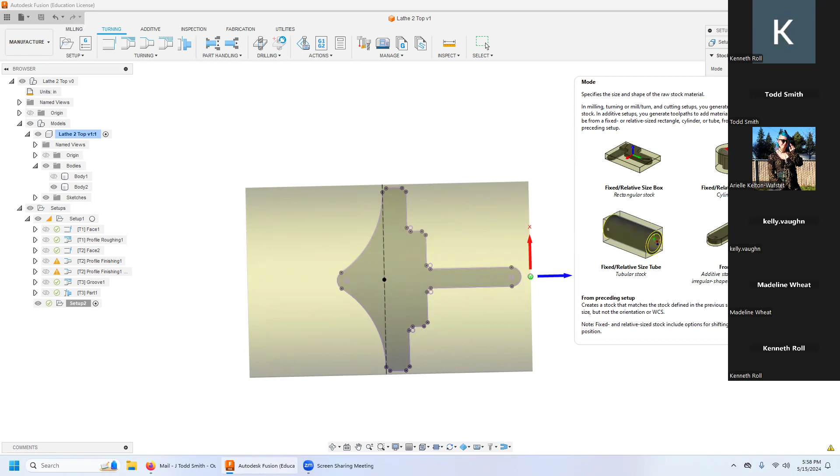Okay, so let's talk op 2. I'm going to come up here to setup again, and we're going to click on that and see they've gotten a setup 2 there. Some small things we're going to change though. We're going to go into stock, and the default was from preceding setup. Only this time, we're going to add in continue rest machining. Actually, let's try something else. I haven't done this one before. Let's try a fixed sized cylinder.

And model position, well, we're going to come back to that. Okay, well, we see that our Z is facing the wrong direction. We want it to be like here. I'm going to switch those bodies there, and we're going to flip the Z axis. Duke, there it is. And we don't want it on the stock front, we want it on the model front.

Okay, now at this point, we're going to go back to stock. And model position, it's going to be from front. And we're going to add in 30 thou. Let's see if I can make this work the way I want it to. Doesn't always work out the way I want. All right, setting our safety up a little bit closer. Let's see here. I think everything's looking okay there.

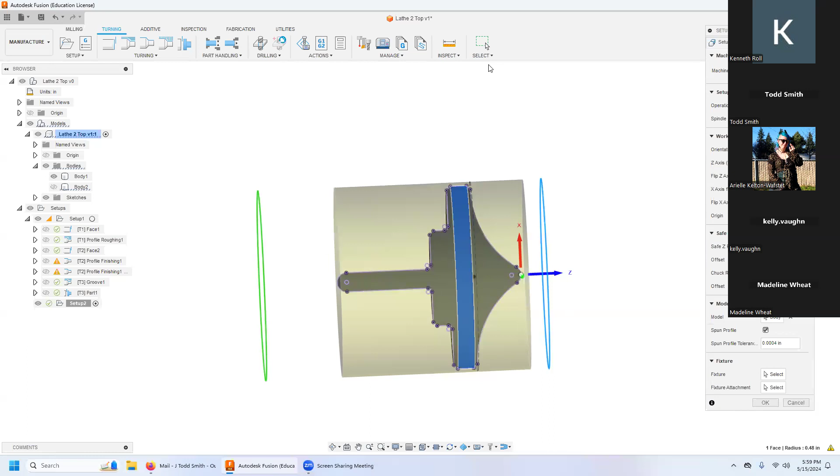All right, and we're going to name this one 52403. Third program of my day. Ta-da. All right, it's not doing what I was hoping it would do. It's showing the model. It's okay, we're going to keep going and see how it goes.

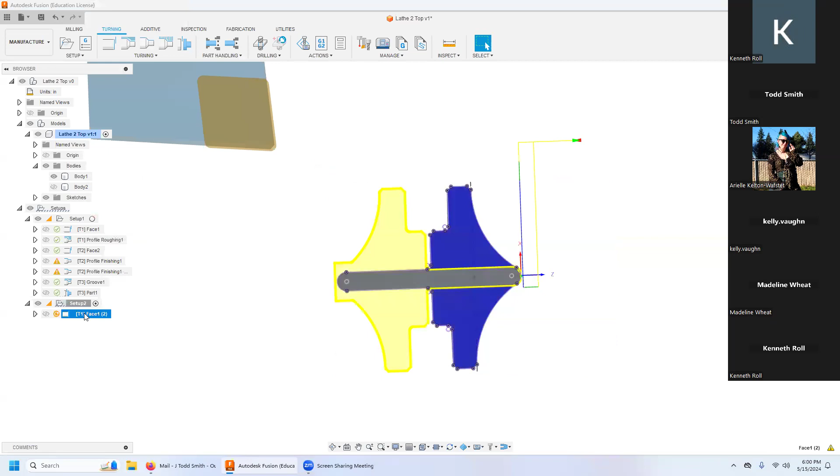All right, face, I already did it once, why do it again? So I'm going to duplicate, grab that second one, drag it down to setup 2, open setup 2 again, go into face, make some changes. I'm going to go edit. There it is, just right. And I hardly had to do a thing. Isn't that cool?

Okay, and now I'm going to grab profile roughing, and I'm going to duplicate. I'm going to grab profile roughing and drag it down here. We can see that it's going to go where that blue line is. There it is. And I'm going to edit.

And I need to make some changes on this one because we had it just itty bitty there, right? Well, now we're going to bump that. Oh no, we wanted it all the way in. There we go, that's what I wanted. I remember now, get that clearance in a little bit. There we go, okay, passes. Oh no, I did want that in, I remember now. Boy, I've got the dumbs today, guys. Don't mind me. Let's try that, see if that's going to work out.

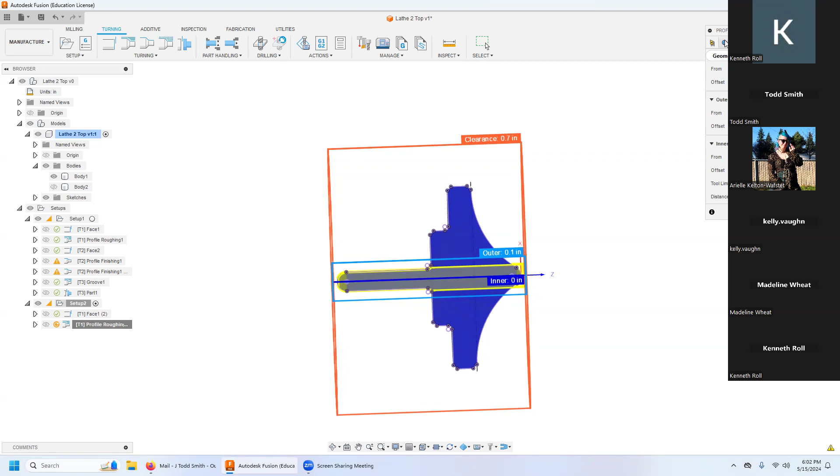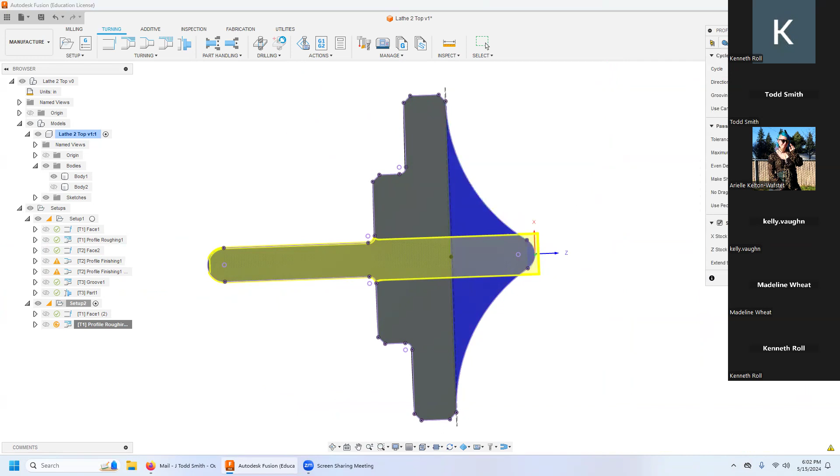And with that being the case, let's move this one up to here so we don't waste time. Oh hey, look at that, it's kept our previous chain. But let's change that to being okay, those two. Okie dokie, everything else should be okay. See how it does.

All right, we've got a little extra that we don't need on our toolpath. We could rein that in using our radii and our geometry. But all in all, I'm just going to leave it alone, it's not going to hurt anything really, it's just going to be slower. Now, it thinks it has material here, which could be a problem, but I'm going to ignore that for now and hope.

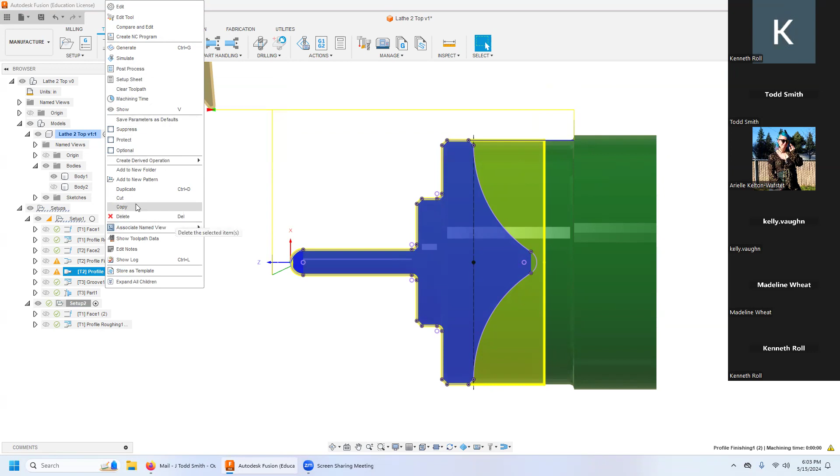So I'm going to duplicate that profile here, and I'm going to drag that one down to here. Let's edit. Let's change our geometry so that, for one, our fixture is going to be holding this, so it's going to be right along that line. And we've already cut this line right across here anyway, so we don't need to do that. Let's drag that back to, well, let's start here.

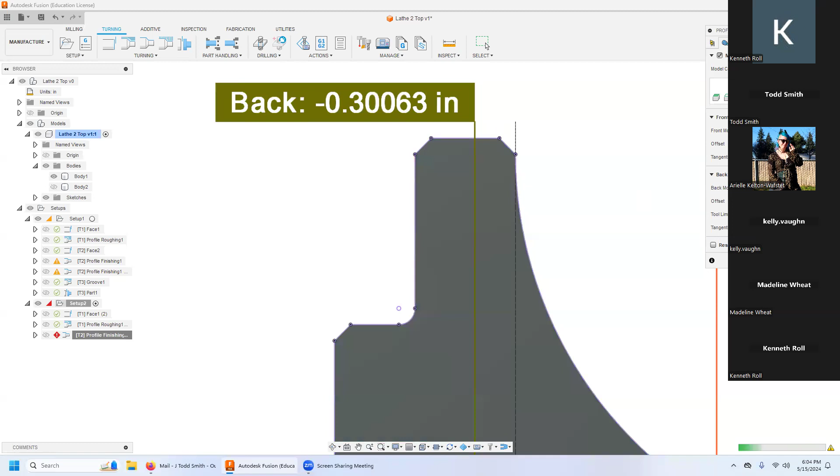And then we'll kill that tangential extension, and let's take that back another 30 thou and see what that does. Probably more than we need. We'll just see what happens.

Okay, our contour though is going to be an open contour, grabbing all to here. We're not going to go past here because you've already cut that. So honestly, in our design, we should probably have a little bit of a fillet on this corner so we don't get a burr, because we have a very solid chance of having a burr right here because of that. It's all right, we'll leave it alone for now. I'll just mark you down later for it.

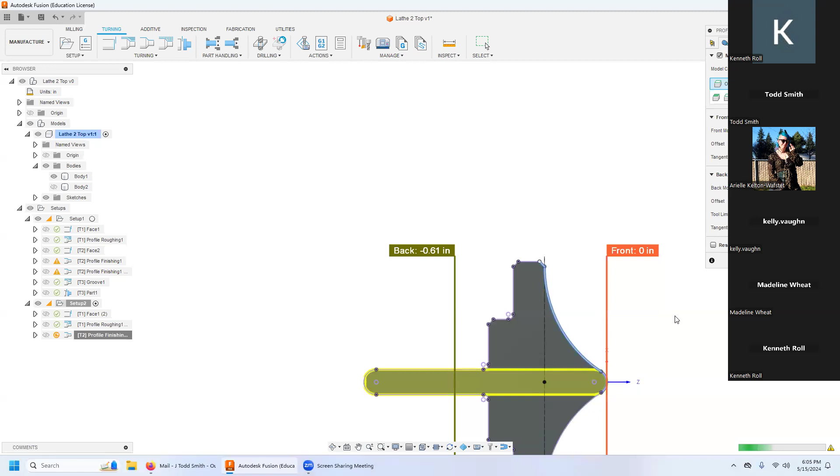Let's check our radiuses. Everything's good there. Let's turn off sharp corners and maybe it'll get rid of some of those burrs. Let's find out, see what it does.

Okay, I still don't like this one here. I would probably, if it were my time, instead of wasting you guys' time, I'd probably play with it until I got it coming in straight, just for the sake of the operator. But all in all, looking pretty good. Let's run the whole thing.

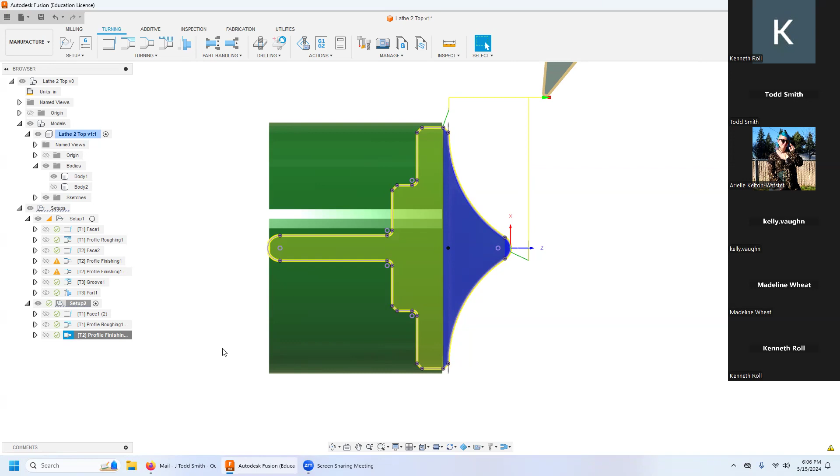I'm going to turn off my sketches and bodies. And here we go.

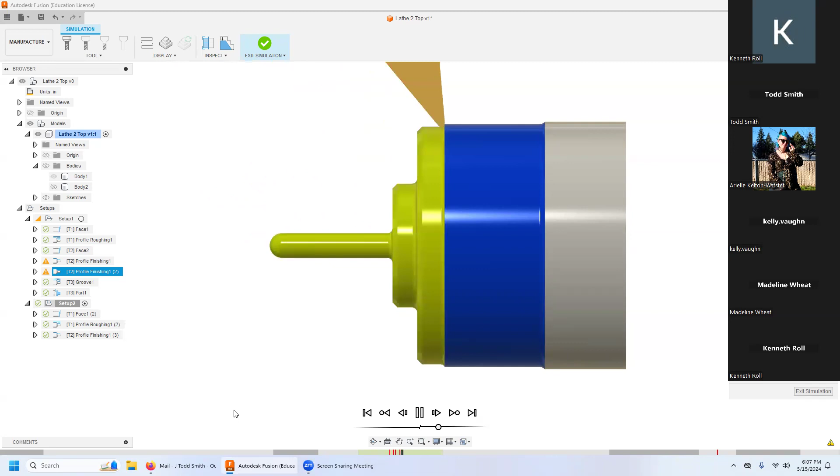Facing. Now we're taking off that corner. Who knows, maybe it'll be good, maybe it won't, we'll find out. And those aren't really crashes.

Oh, that's really aggressive, probably want to change that. Okay, that material is there, not there, so it didn't crash for real.

Probably should have faced with that finish tool there in between. Yeah, but all in all, we're looking at it. That's a nice profile.

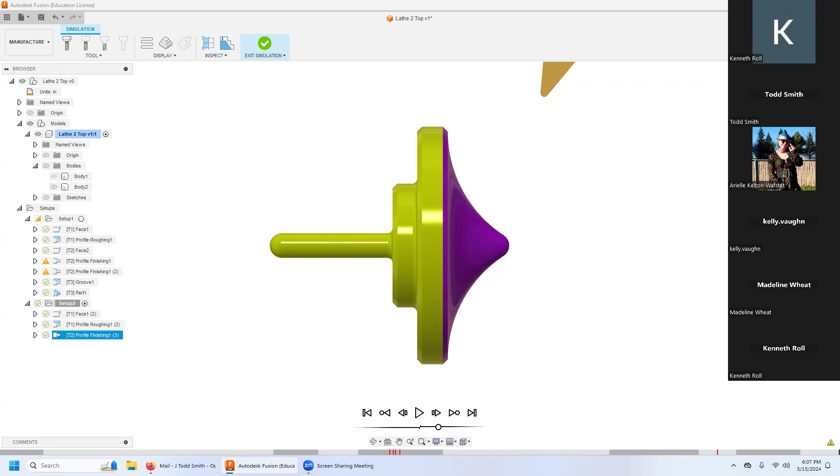Okay, so let's turn those bodies back on. That is the large part of our lesson for today. If I change that over to a visual style of shaded, and we made that. Hopefully so, I think it's been pretty decent. Who knows?

So I want you guys to do something akin to that. The features you need: it's got to have a point to spin on. I recommend more than 1/8 of an inch between the tip and the flywheel. It can be shorter, it spins better when it's shorter, but it's harder to get started when it's shorter. The diameter for the nose here can be anything you like.

Rounder ones are easier to start, but don't spin as long. Or that is to say, larger diameter ones. Do whatever you want for the flywheel. I recommend either on this side or on this side of the flywheel having something for an op2 collet to grab onto. And then you want some fashion of spindle. Make your own choices there.